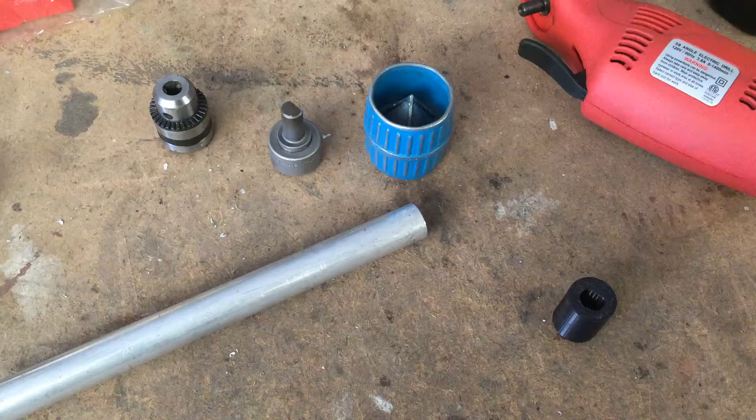Today's challenge is to make a tool that will clean up the end of this aluminum tube. This is 7/8 inch outside diameter aluminum with an 058 wall, which means a 3/4 inch ID. I have this tool here, which you can get at Home Depot, and it reams or chamfers the inside of the tube and the outside.

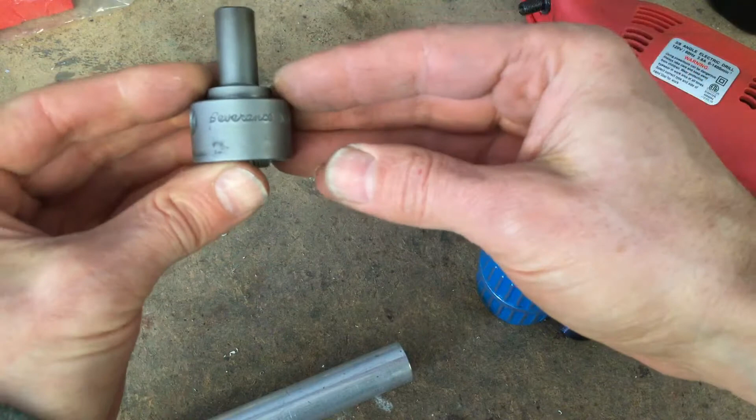Just turn it around there, and that works good. I have another tool here. This tool reams the inside and the outside at the same time. This tool is from a company called Severance.

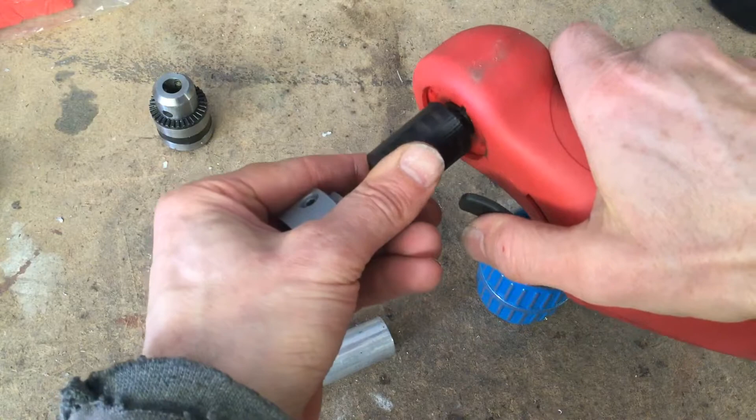It's a KJ tube type tool, and that works real well. I made a device here that this fits into, and this device has a 3/8 24 nut in the back of it, and it threads onto this drill that I bought off of eBay. Lots of drills have 3/8 24 thread on them, and they come with a chuck like this. This chuck I took off the drill, and now I have a powered reamer, so that works okay.

The problem is that I need 6 of these. These are about $150, which is okay, except I don't want to spend all that, so I am going to 3D print one, and my reamer is going to look about like this, except it's going to have an inside and outside tool like that, and we're going to see how that's done today.

I'm going to use Solidworks to make this part, and this is actually the assembly of the finished unit of what I'm hoping to end up with. You can see there's a 3/8 24 nut in there and some hardened steel inserts in there, and let's see how I did that.

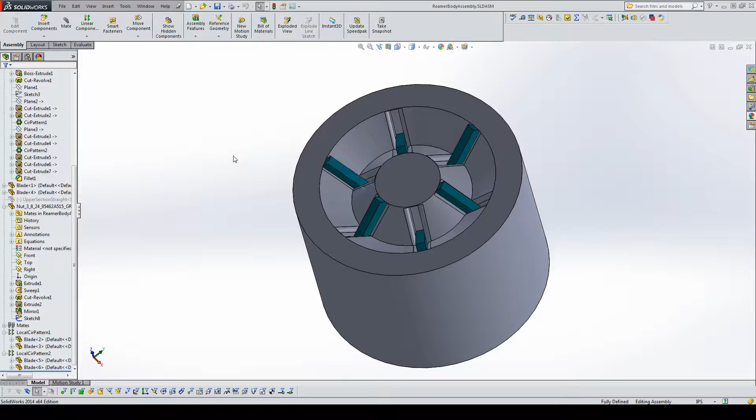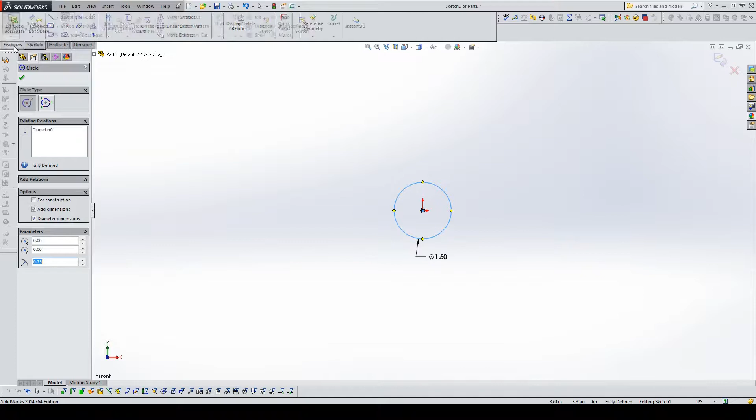Let's start with a new part here, and we're going to do the body. We'll do the body on the front plane because we're going to 3D print it, and I want to rotate it later. We'll start with a cylinder of a base about, let's try 1.5 inches to start with, and we'll start with it about an inch tall or so.

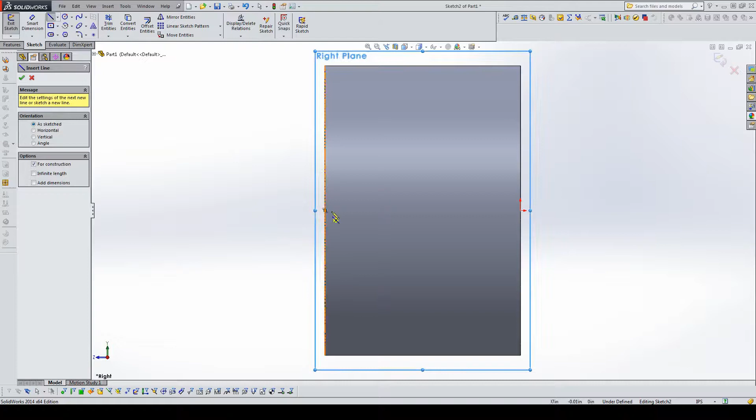Then I want to get on the right plane here, and we'll do a sketch on the right plane, space bar there to see the planes. Then I'm going to use a center line, and I'm going to go off the origin here to get some symmetry. Let's see, I'm going to switch line types here to a regular line. That is going to be the shape we're going to revolve around to make our first cut.

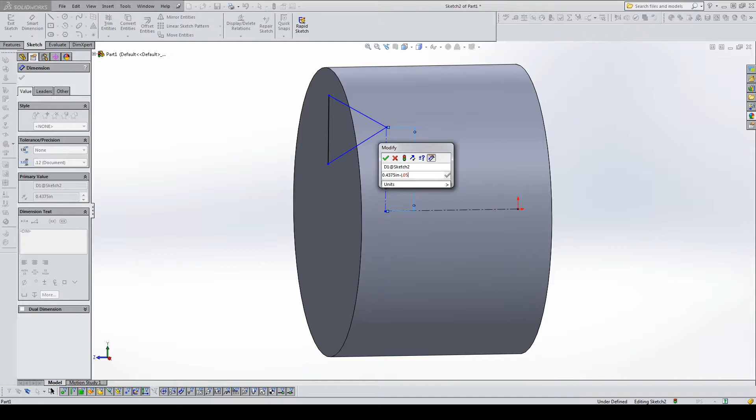Let's put some dimensions on there so we can change those afterwards. This right here is the most important dimension. Since this is going to be a 7/8 OD tube, we're going to start 0.875 divided by 2. I'm going to do math right in the box here. But that's not quite where we want to be, because we still want to subtract a little bit here. I'm going to do more math in the box. So 058 wall, we're going to divide that by 2, and we're going to subtract that out of there. So we want that thing centered in there.

Escape to get rid of that dimensioning tool. We'll select these two lines. I'm going to put some more symmetry on there. You can pick equals from here or equals from here, and that'll make those two the same.

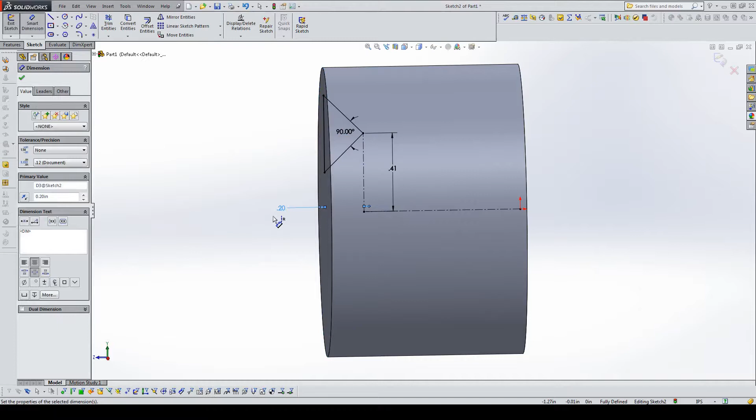And then I want to set, oh wait, that's not what I want to do. I think I want to set the angle on this and not the distance on that triangle. Let's set this, I'm going to try it at 90 degrees here. And then the depth of this thing here, the depth of our cut, let's try it 0.2 inches to start with. All right, so there's our sketch.

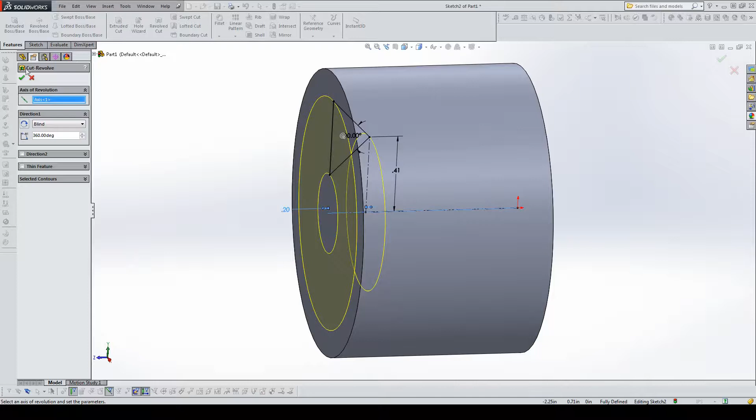We're going to extrude or revolve a cut around there. So it knows I'm already in this sketch, so it wants to know what axis I want to revolve around. I'm going to turn on my temporary axis here, and there's the blue temporary axis. You can see the preview, so I like that. And there is our first try here, or our first step in this.

I'm going to do the rest of this in an assembly, so we need to save this. You have to save the part before you can do it as an assembly. Let's save it as the body. We're going to replace the one that's there. Then we're going to do a new assembly here.

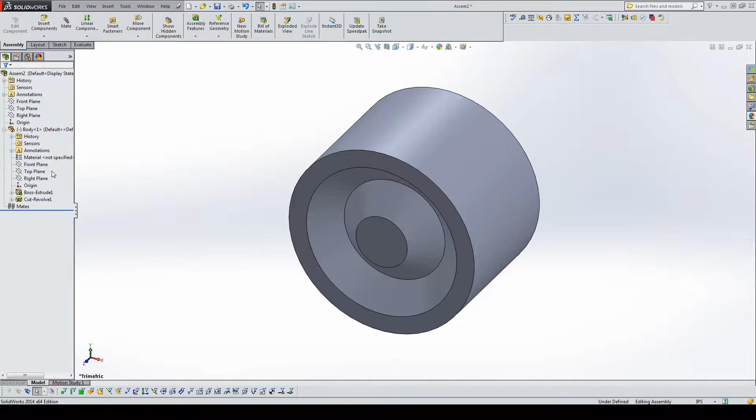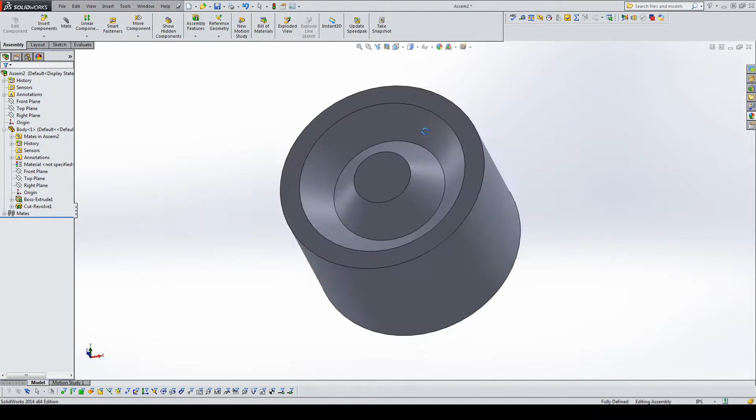And we're going to insert our body. And just to get symmetry on that, the way I like to do it is float that. We're going to stick the front plane to the front plane, the top plane to the top plane, and the right plane to the right plane. In a lot of cases, in this case maybe it won't make any difference, but a lot of times I like to do that, and that's going to help in the future.

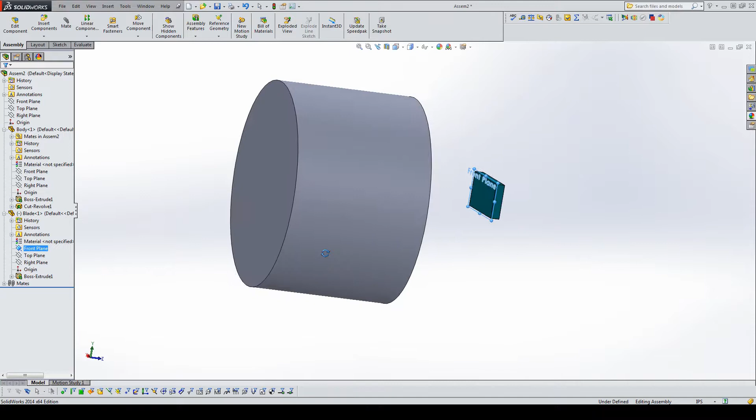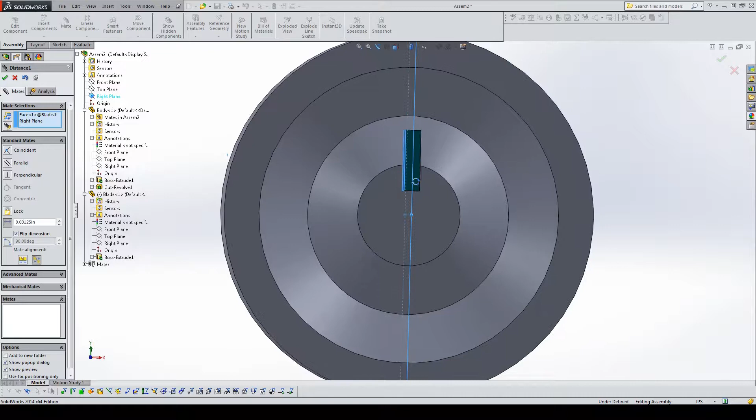So the part we need to use here is the blade, and I'm going to use the planes to get symmetry on this blade. So we're going to get on the front plane of that blade, I think. Is that what I want to do? Actually, I can maybe just get on the front there, and I'm going to get on the right plane, I think. And I don't want to be right on it, I want to be half of that, and I happen to know it's 62 thousandths divided by 2, so we'll get right in there.

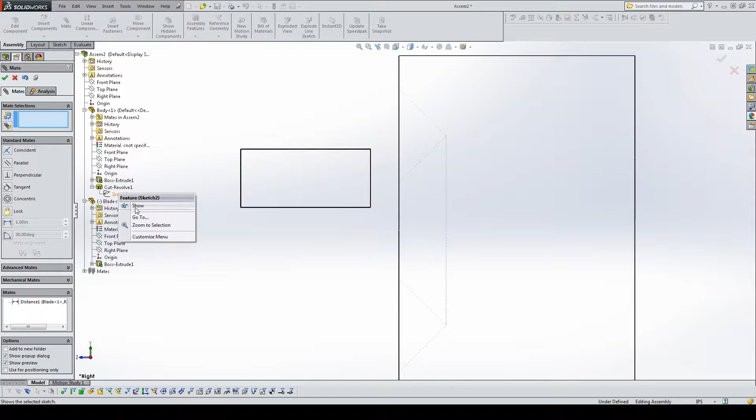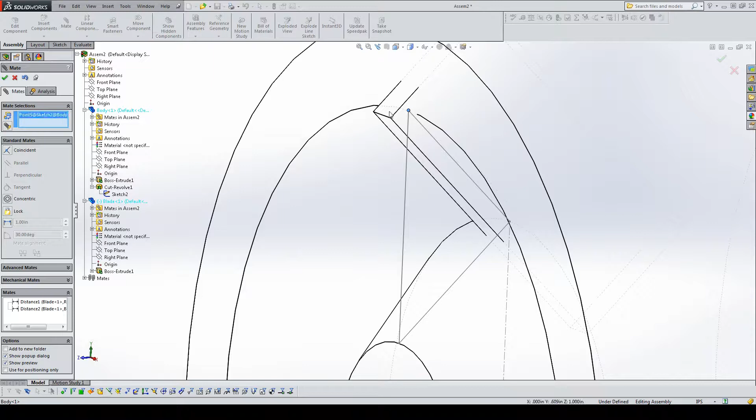And then let's see, let's get from the side here. Let me get this turned on. Let me turn on the sketch for the revolve so we can see it. And now I'm going to get this line and this line right here, a distance, oh, I don't know, maybe let's try 50 thousandths. I like that. And let's see, let's get this mate right there, and I like that. And is that thing stuck down? That thing is stuck down. Okay, so there's that step.

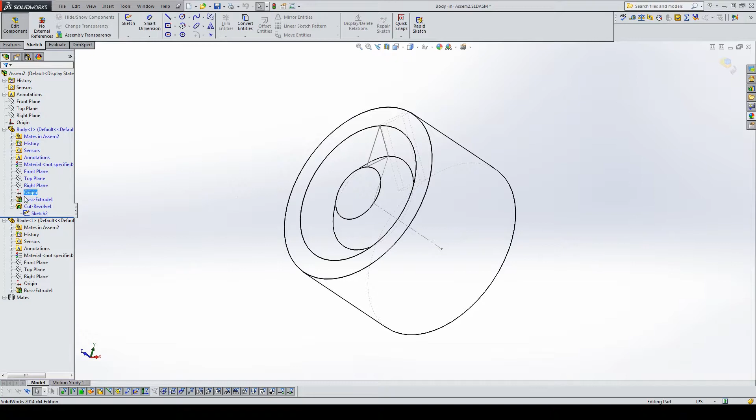The next thing we need to do is add another sketch and another blade. We're going to edit the part here. I'm going to go on the right plane and turn on the temporary axis and get that temporary axis, and insert a plane. The plane's going to be at 60 degrees.

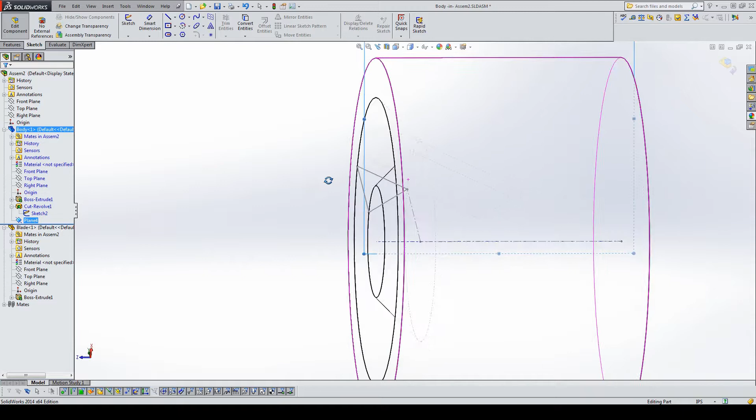On that plane, I'm going to draw a few things here. The first thing I'm going to do is grab that line, which represents the bottom of that groove, convert that onto my plane here. Am I sketching on the plane? I'm not sketching yet. So now I'm sketching. Now I grab the line, and okay, so it's on there.

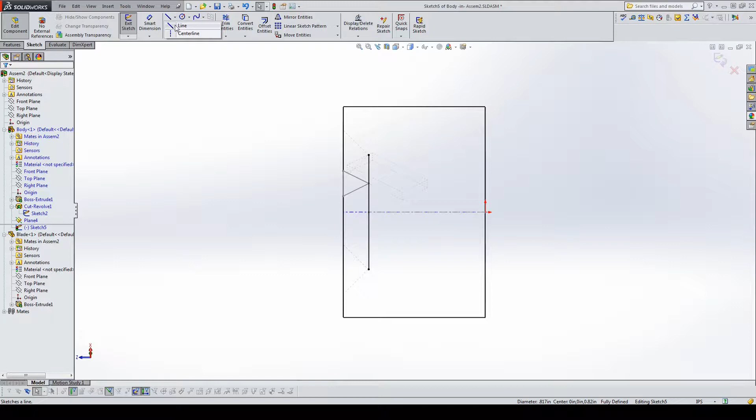And so now I want to draw some of my lines on here, and I'm using the lines that are already on there from the sketch that I project on there. So you can see that my points here, it's coincident there, and this one is coincident, and this one is not coincident yet. Let's see, maybe we need to draw a center line from there to there so we can get some coincident thing on there.

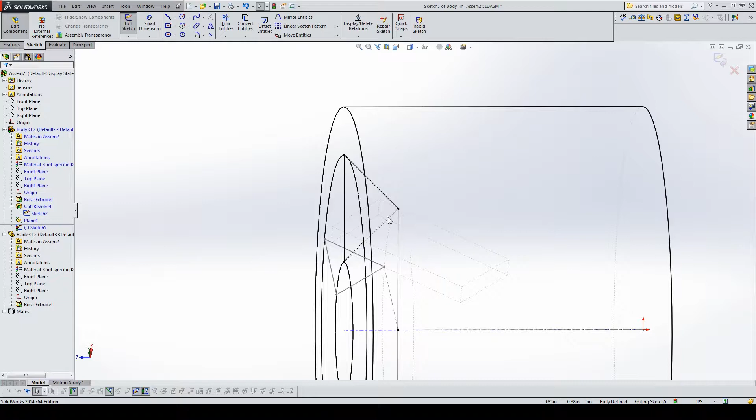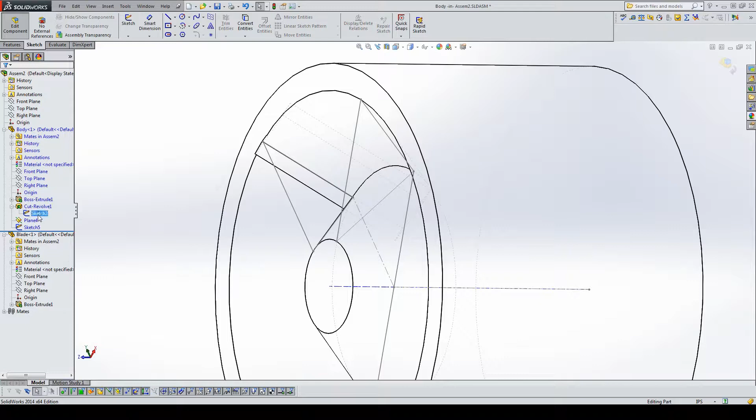And I think that's going to work. Let's see here. So if I change the dimensions, let's get out of this sketch. And if I change the dimensions in this sketch, let's see here, let's just change this to 0.25, and let's see if it updated. Yes, so it updated my other sketch there. All right, so let's change that back, and we'll change this to 0.2.

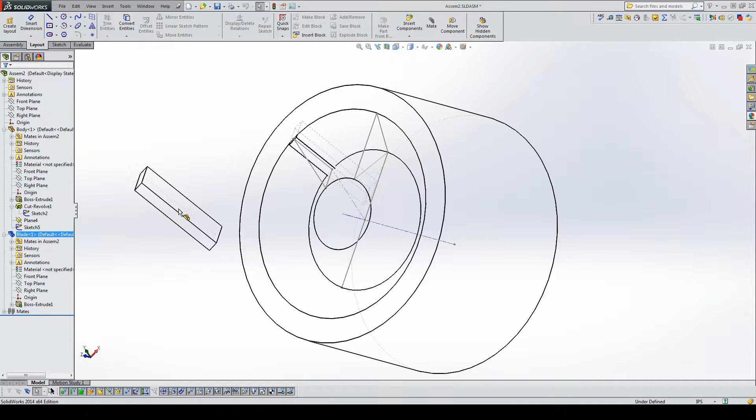Okay, and now I need to bring in a blade. So I'm going to get out of that part there, and I'm going to select my blade, hold down the control key, bring that blade out. We're going to stick that blade onto plane 4 there.

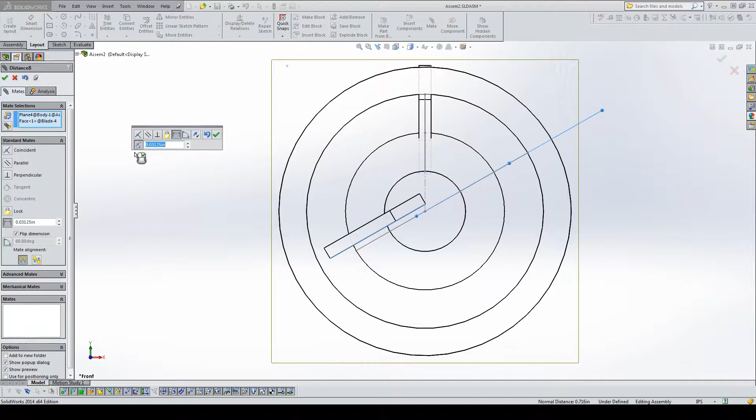We're going to make it not an angle, but a distance. Let's get front here. We're going to go half the thickness of the blade again. And then we're going to go the other side. So there we are, half and half there.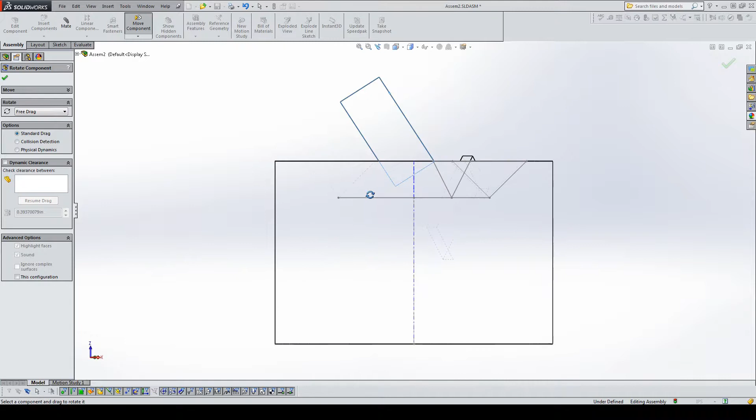And then what I need to do is get this. Let's rotate it and get it close to what we want. Somewhere about there. Let's get normal to it. We'll move it here. And then we want to get this edge, and oh wait, we will go a little outside there. It's this edge and that edge that we want to stick together there.

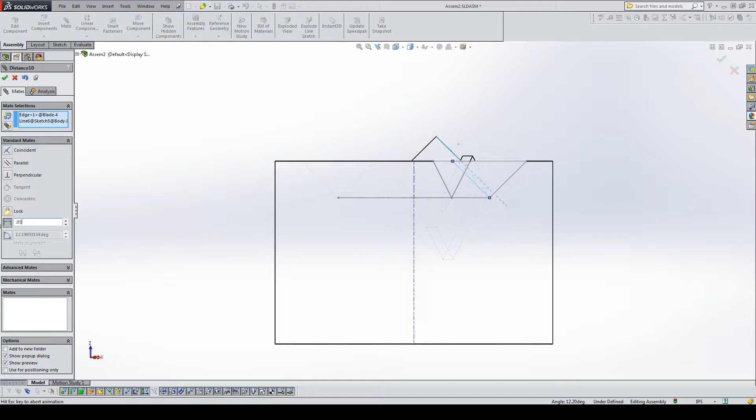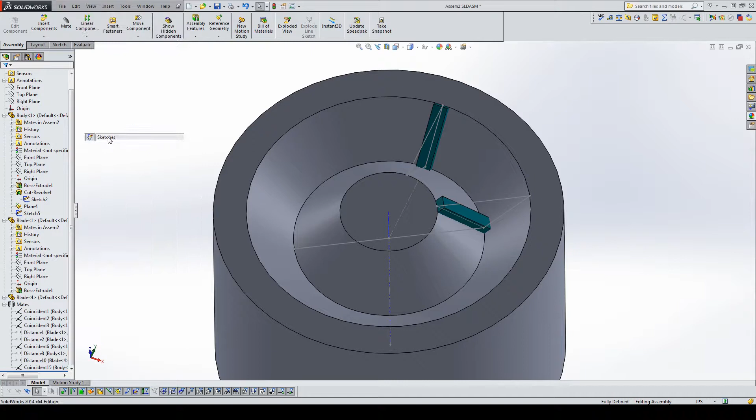Let's do a distance. And let's do that. I think we said 50 thousandths for the other one. And now we'll get in here and we'll go there to there. Let's turn this on so we can see how everything's looking here. So I think I like the look of that. We can turn off our sketches so you can't see the sketches, and we can turn off the temporary axis. And there's a couple of blades put in there.

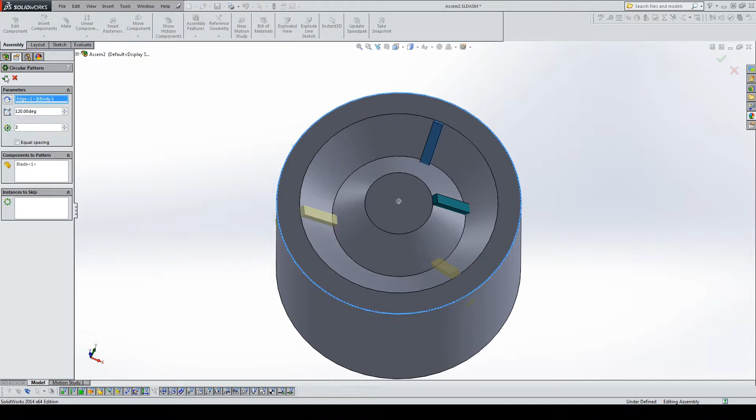The thing that we can do here now is copy these blades around into some patterns before we make our holes. Let's go with 3 blades, evenly spaced at 120 degrees. Then this one we'll do on a circular pattern as well. That one probably could have been on the same circular pattern, but we've got it in 2. So that looks pretty good.

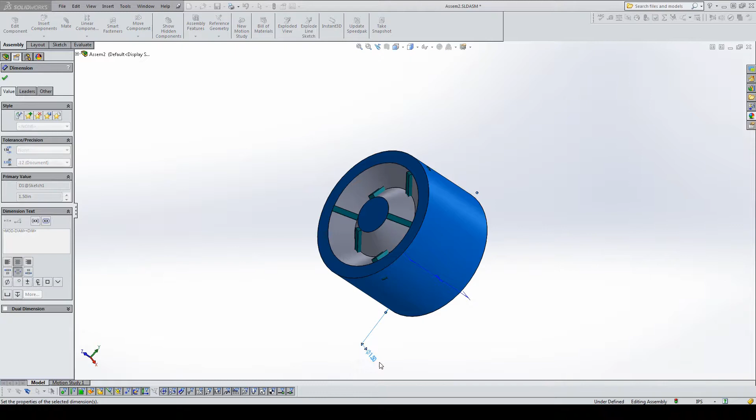Looks like our body needs to be maybe a little bit bigger. Let's try 1.55 there. And that looks pretty good.

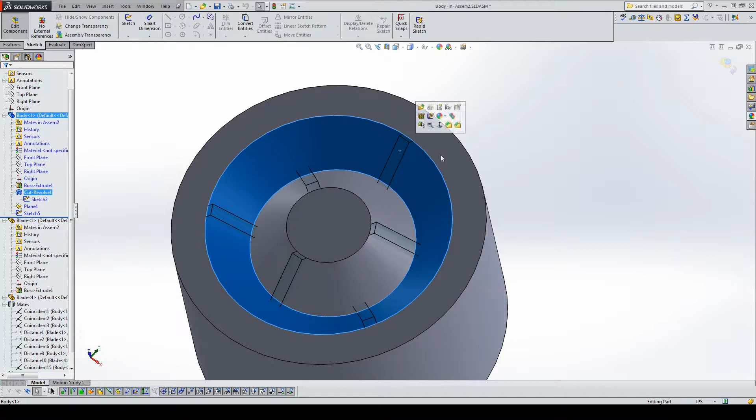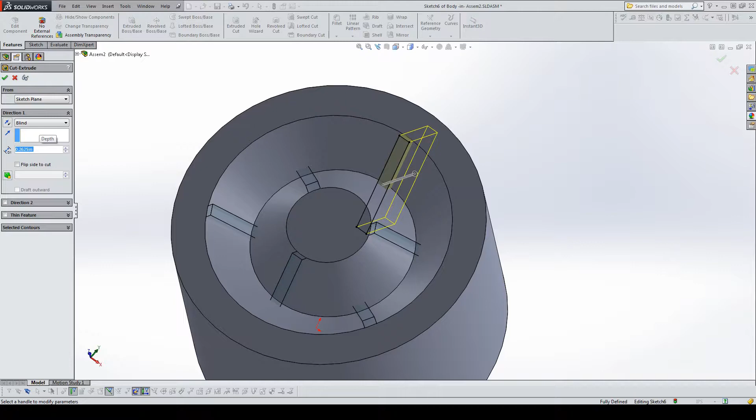Now we're going to make the cuts in the part, so we're going to edit the part again. Let's just start with this blade here. I'm going to select the other face, sketch on that face, and convert my entities there, which just projects that outline onto my current sketch. Then I'm going to extrude that cut in. My blade is 1/4 of an inch, and I'm going to add 12.5 thousandths, just for a little extra depth, because 3D printers aren't exact. So that's that cut, that direction.

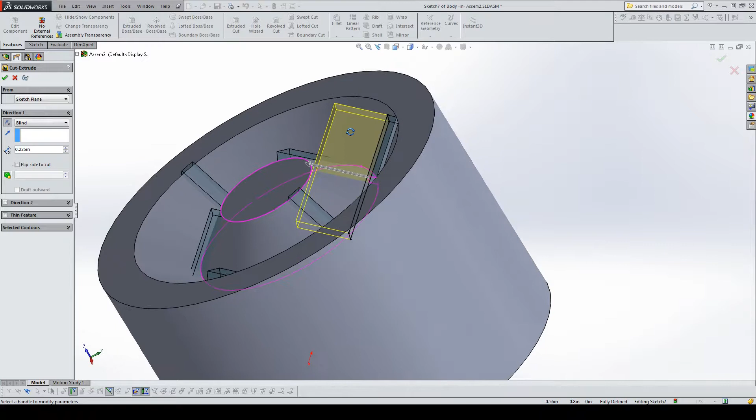I need to make a cut so I can slip this blade in there, so I need to cut the other way. I'm going to select that face again, sketch on it, convert the entities again. This time I'm going to cut about 0.25 the other way. So that slot right there will allow me a space to put this in. That 0.25 looks maybe a little bit big, I don't need quite all that. So that'll allow me a little bit of space to slide that down in there and insert it, is the plan. We'll see how that works.

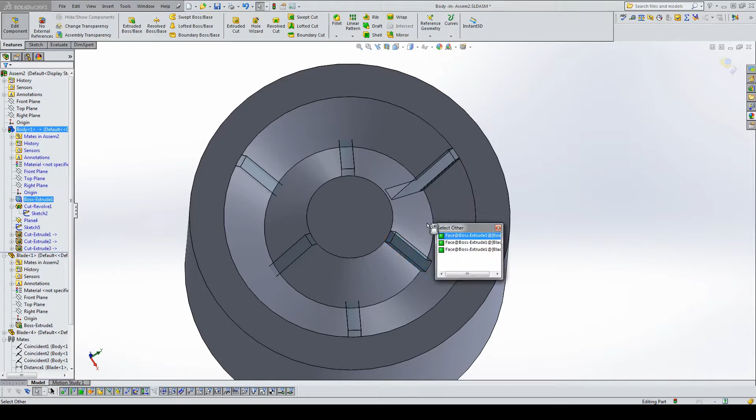So that's that. The next thing we want to do is the same thing to this one here. We're going to select this face and do the same things again, get on there and extrude my cut in. We'll go 0.25 plus 12.5 thousandths there. And then this one, again, we're going to select the other face, sketch on it, convert those entities onto it, extrude the cut. 0.225, I think was the one I went on the last one, and we'll go the other way.

So that looks pretty good. Let's open that body here. We can see those cuts here. That's that cut, and that's that cut.

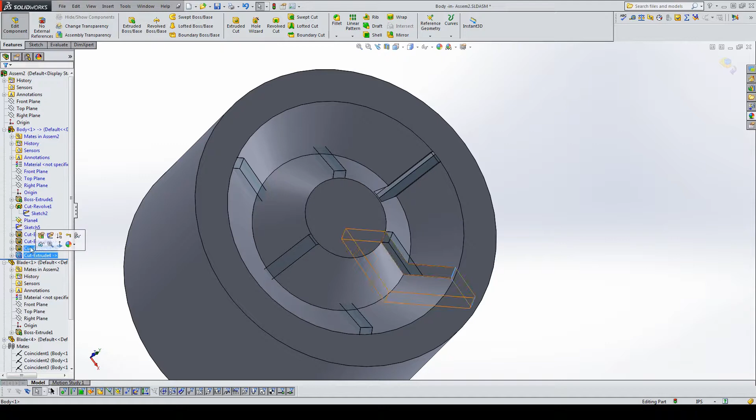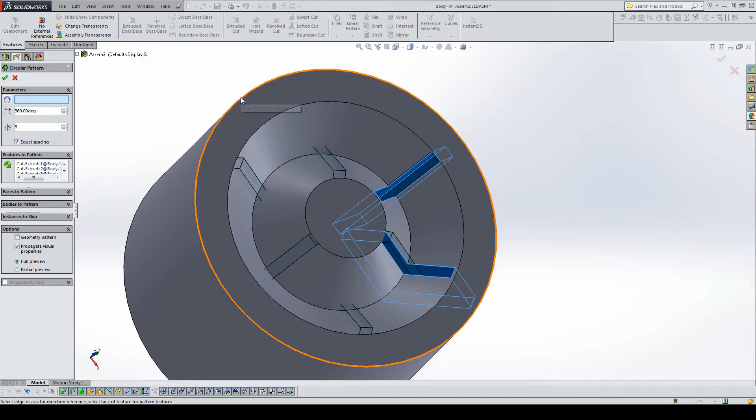What we're going to do is make circular patterns of these cuts here. Let's just do it right here, we'll make a circular pattern. Oh, you know what we'll try? We'll try and make all the cuts in the circular pattern the same this time, which we should have done last time, but we're going to try it this time, see how it works out. Let's go around that thing. We're going to make 3 cuts, distributed 360 degrees. That looks pretty good right there. Let's get out of it. That looks like it worked out pretty good.

The next thing we want to do is put the nut in there, and the nut's going to go inside of here. So let's go get that nut from McMaster-Carr.

I download them from Mcmaster.com. We'll just search nut here, and select regular hex nut. We want to find 3/8-24. There it is. I'm just going to do a grade 5, just a regular medium hex nut here.

So what you do is come here and click on the product detail. Then they have CAD here, and you can save it as a 3D SolidWorks file. We're going to save this one into this folder here, which is going to be right here. We'll just save it right here. Put that nut right there.

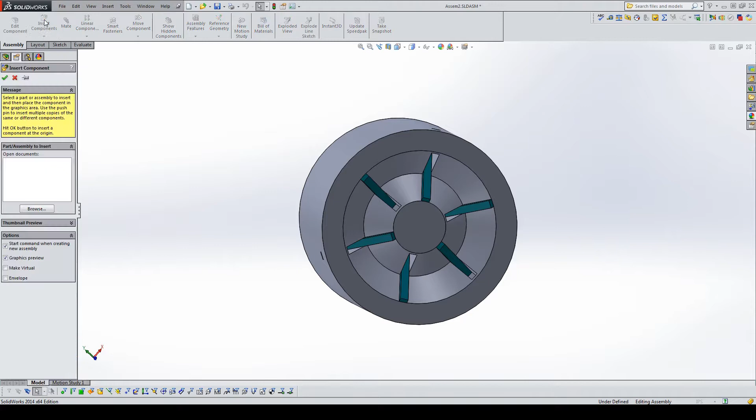Now we're going to insert that nut. We'll go find it here. And that nut ended up right there. And so we get it here.

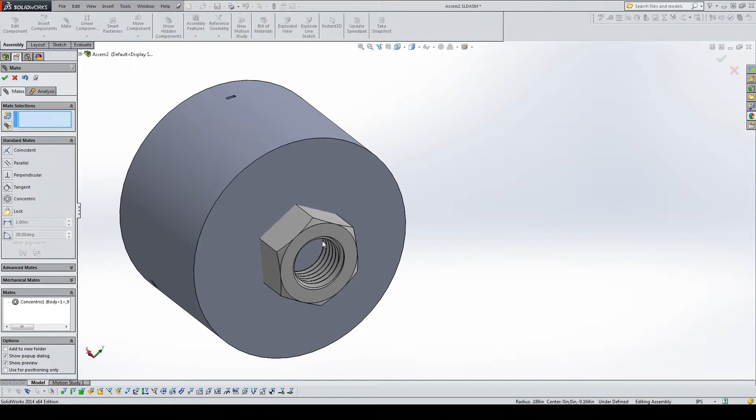So now we got to put that nut in there. The way we're going to do that is we're going to mate this nut here with that, it's going to be concentric. And then we're going to put this inside of there.

By 0.1 of an inch or so. We're going to go inside like that, flip it around.

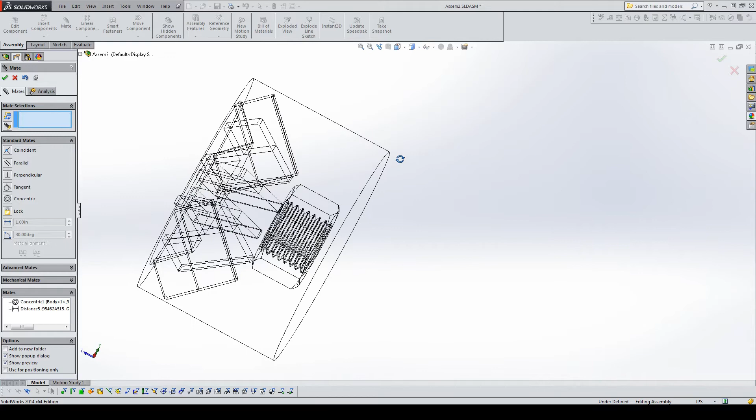We're going to turn this back on here, the hidden view, so we can see it in there. And there's our nut inside there.

Now we have to put some holes in here so we can get to the nut.

Wait, we don't want to sketch on here. We want to open the part, and then we'll sketch on here.

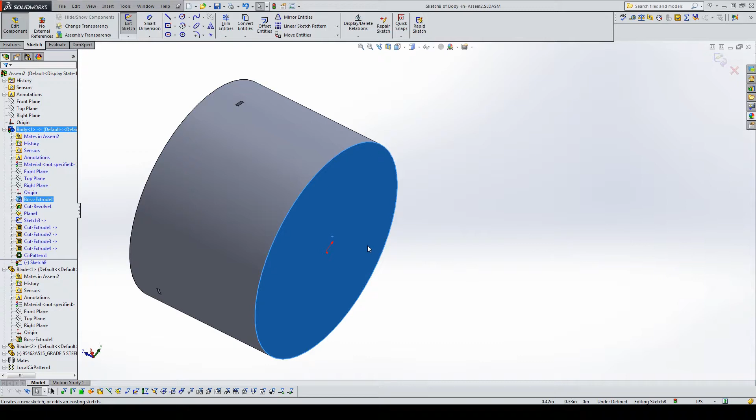We'll put a circle there. The circle, since it's 3/8, we're going to put 0.38 right there, which is a little bit bigger than 375, and that'll allow a little bit of clearance for our threads to go through. We might make that a little bit more here in a second.

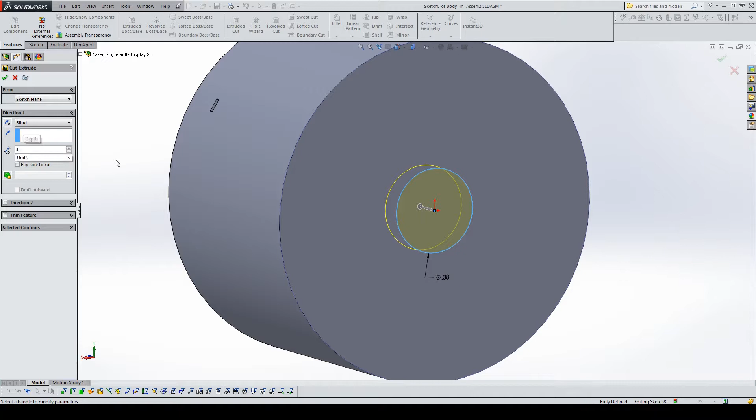So we'll go up to 0.1 here, and we'll get that hole in there, and that should be about where that nut is. And then right on there, we're going to...

Sketch another thing here. We're going to sketch a 6-sided thing here, and we'll put that out there.

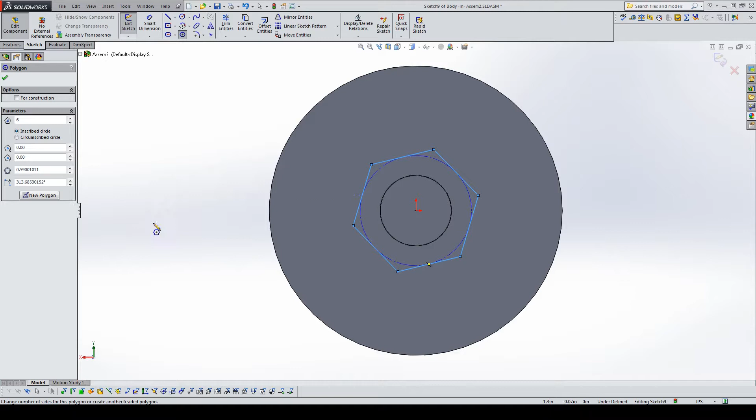We know that the nut is 9/16 across, and I'm going to add, I don't know, 20 thousandths or so to that, just so it fits in there nice.

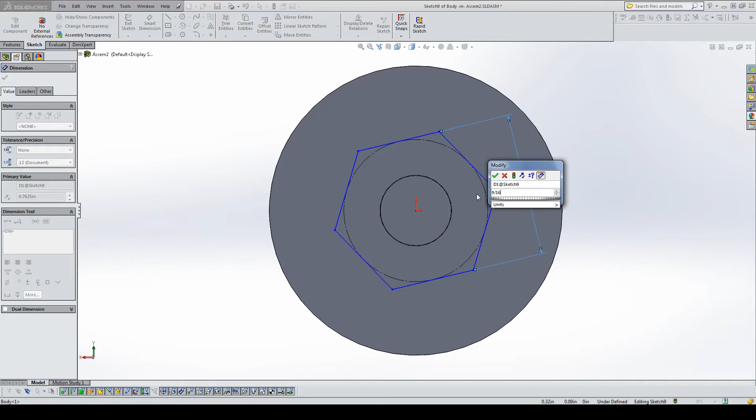Oh, that's not what I wanted to do. We want to go 9/16 plus 20 thousandths. So there we go.

And now we want to extrude it. How deep do we want to extrude it? Well, we can go look at the McMaster-Carr sheet here, and it says it's 21/64 deep. We can go 21/64, and then I want to add a little to that, 20 thousandths or so.

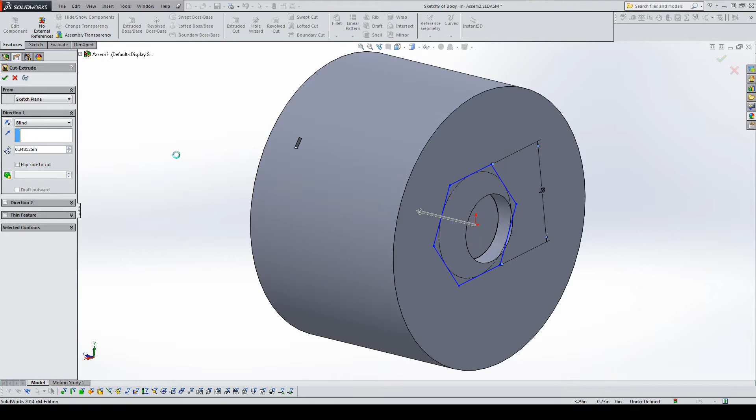So now what we have here is, if I turn this on, you can see there's a nut inside there, and that nut is floating inside of that, and I could put some mates on there if we wanted to.

And maybe we will just for fun. So the way I'm going to do this is...

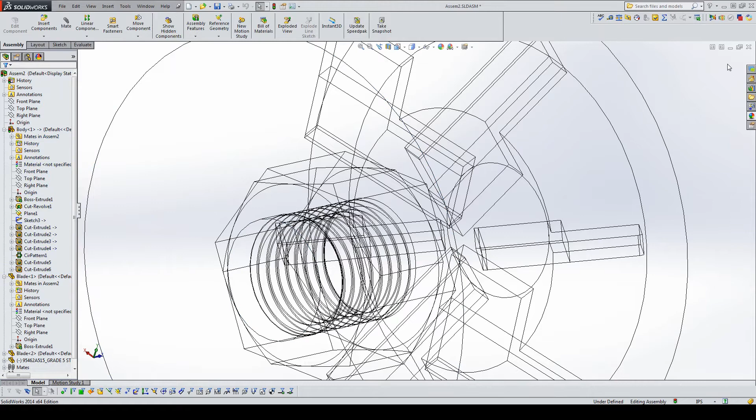Let's get out of the part here, and we'll select this face here, and then we'll select, oh, I didn't select it actually.

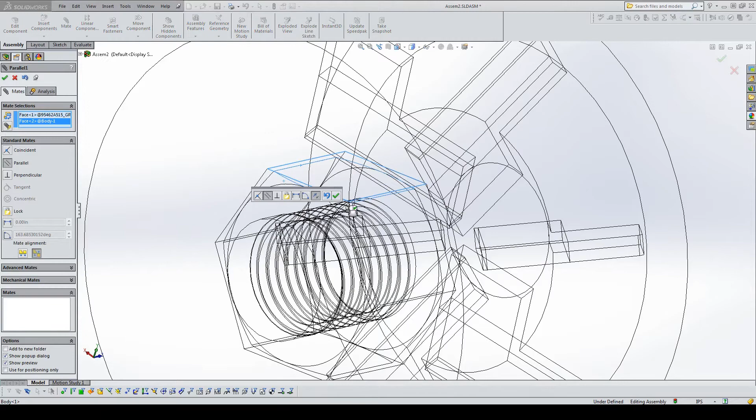We'll select that face, and then we'll mate that face to this face there, and we'll say that that's good. All right, and so you can see that that nut is in there.

All right, let's get this turned back on. Let's do it like that. You can see I want to make this a little bit bigger. It's sticking out there a little bit, and I think we're about done here.

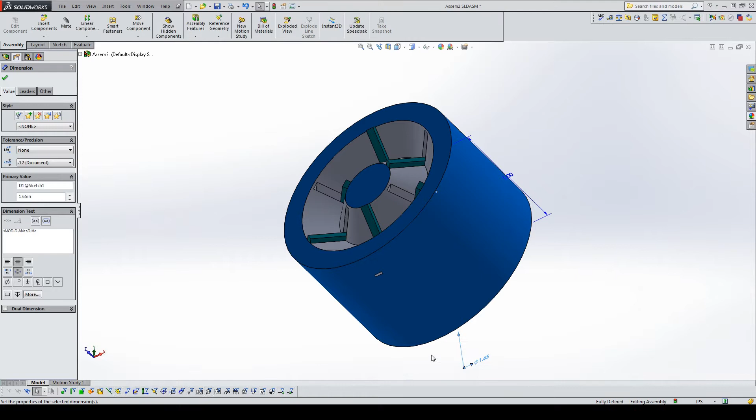Rebuild that. Let's get a side view here of it transparent and see. Oh, we need one more thing in here.

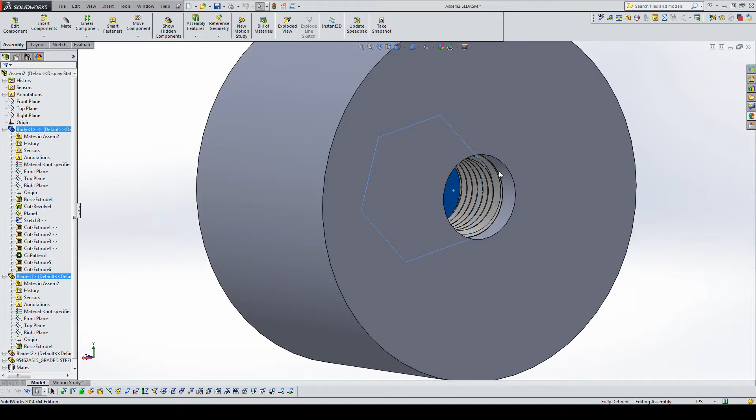In the bottom of this hole, I want to turn this back on. I want to sketch a little hole so that I can, let's edit this part so that I can, when I put the screw in there, it will be like a lock nut.

So we'll put a little hole here. We'll make this about 0.365 or so, 10 thousandths under 375.

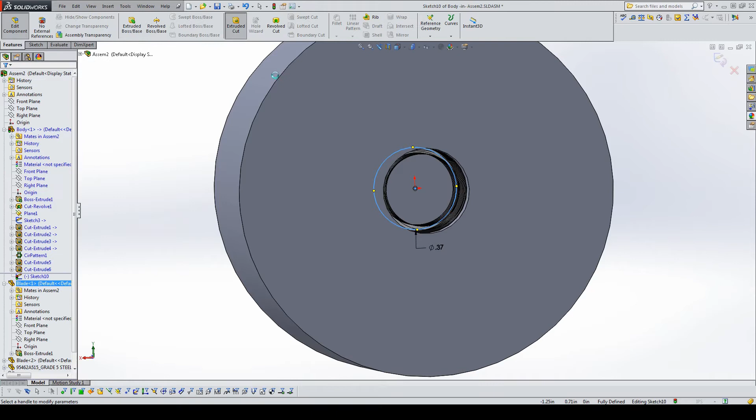Then we'll cut that in about 3/10 of an inch or so. And now let's get this transparent and a side view, and you can see that I'm up into the blades there.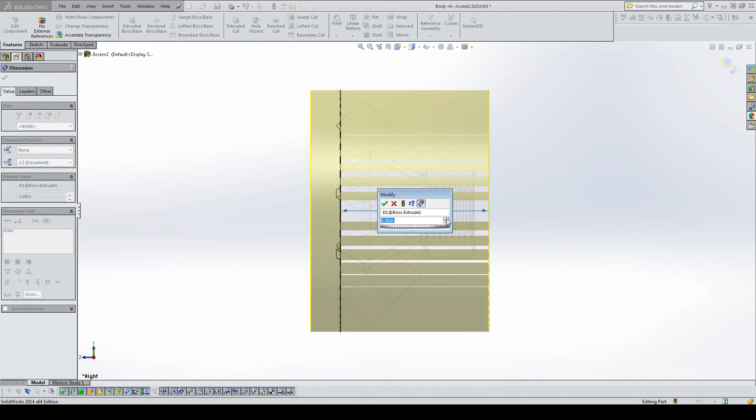So let's make this a little taller. Let's go a couple of clicks here. We'll rebuild, and now it looks like I'm going to clear the blades.

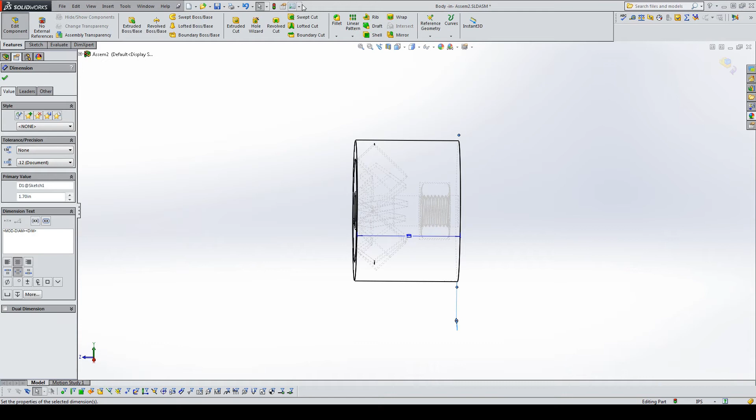While I'm here, I'll make this a little bit bigger. I can see I'm sticking out just a touch there. Let's make it 1.7. And let's rebuild all this. And this looks good.

And I think we're done with Solidworks here. So we'll just save this, save it all.

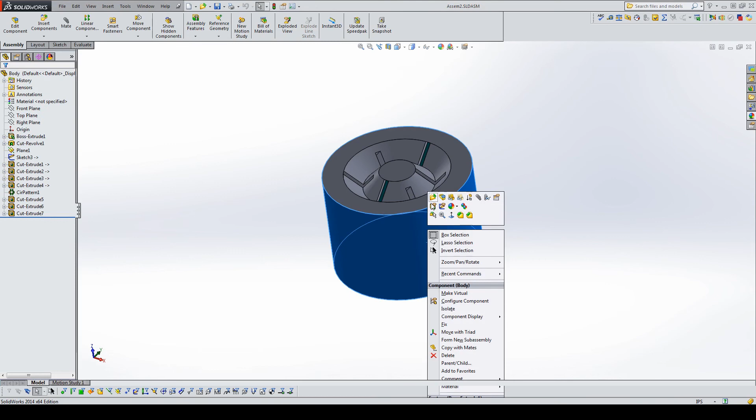So then we'll open the part here, and we'll get ready to do the 3D print. So we'll do a save as, do it as an STL. We'll just call it the body.stl.

And that's it, and that'll be the next video.